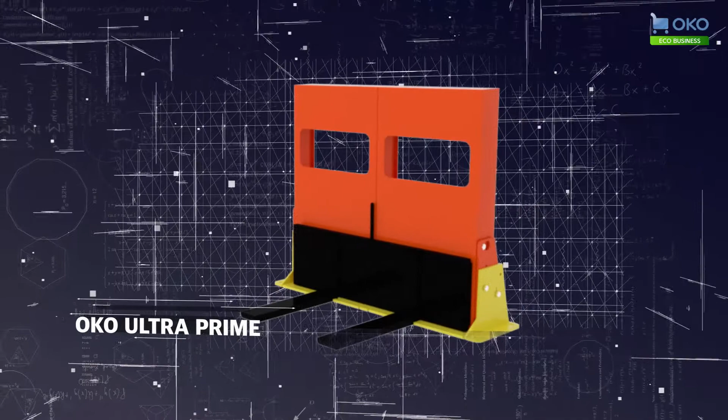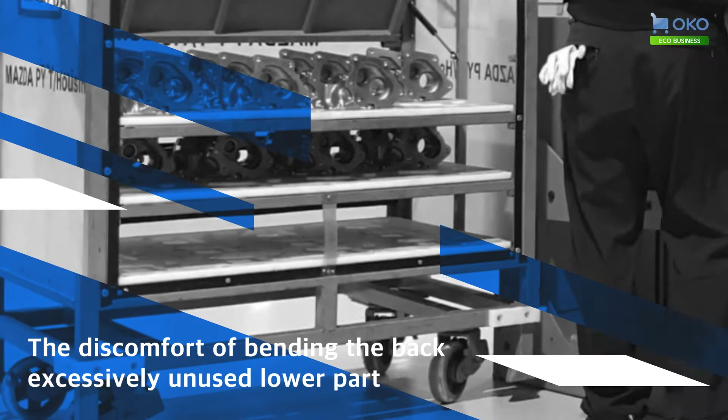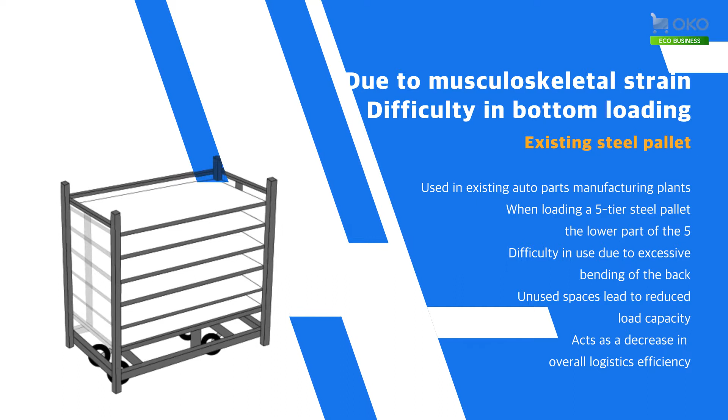In every process of logistics, OKO's Ultra Prime increases load capacity with decreased number of shipments, reduced carbon emissions, and costs. The 5-leveled steel pallet used in existing auto components manufacturing plants was not used for reasons of excessive waist bending when carrying from the 2 lower stages of the steel pallet. These unused levels resulted in reduction of load capacity, which caused the entire logistic process to lessen its efficiency.

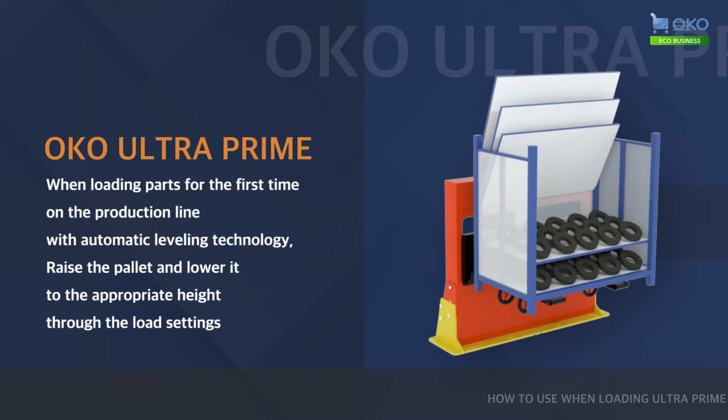OKO's Ultra Prime provides a highly efficient logistics system by focusing on these facts. Through automatic adjusting skill, when the production line loads components primarily, insert the steel pallet into the Ultra Prime fork to raise the height of the pallet, then adjust it by lowering it through load setting.

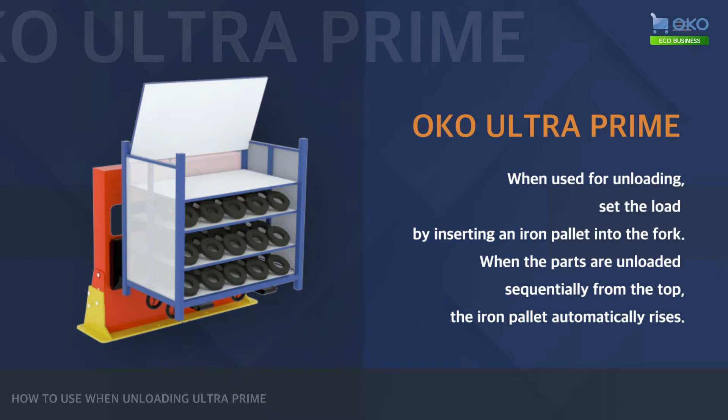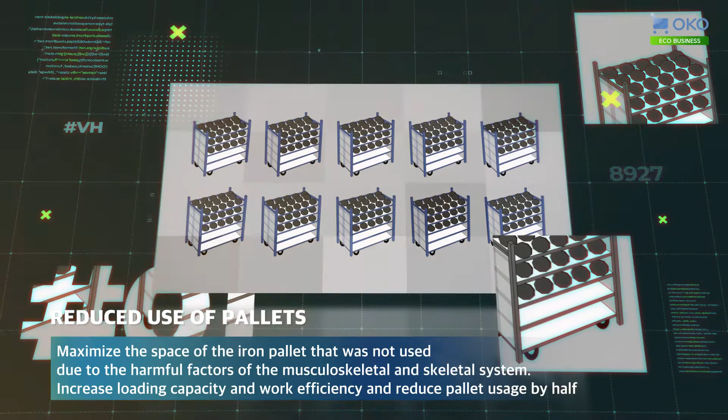Conversely, when used for unloading, the steel pallet will automatically be raised by inserting it into a fork for load setting, then unload the components from the top to the bottom. This increases load capacity, work efficiency, and reduces use of pallet to half of its usage, as it maximizes the space of steel pallet which had not been used as it caused damage to the musculoskeletal system.

In addition, wheels can be installed, and the use of OKO custom pallet with stationary storage attached will reduce the number of pallets by 1/3, and the number of shipments will be reduced by 1/10.

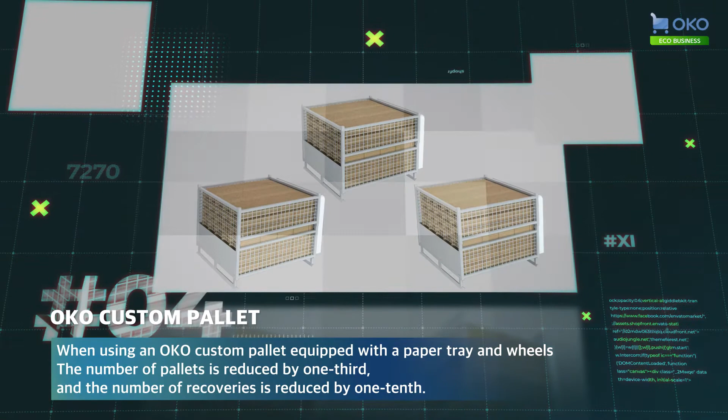In particular, the OKO custom pallet can be connected to a tractor to move large quantities of items in various ways. By using electric transport cars and tractors, the process of arranging parts can be easily incorporated into the assembly line, effortlessly transporting items and decreasing the number of shipments.

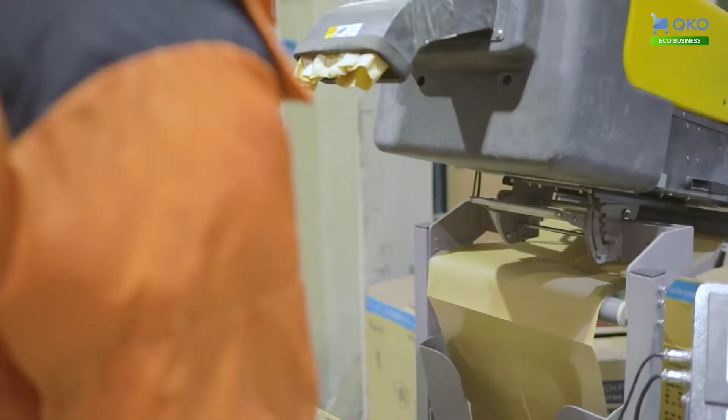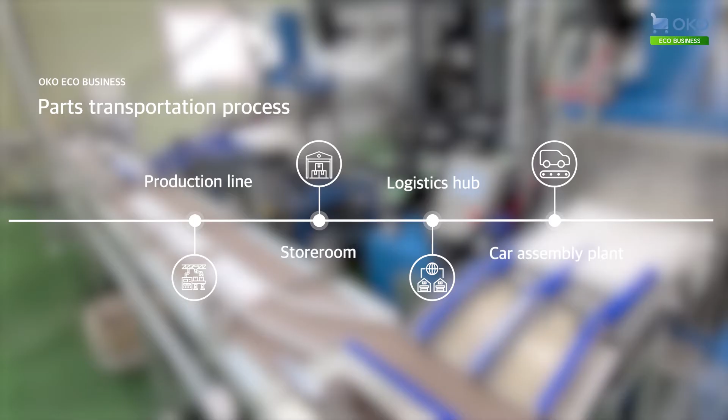OKO Eco Business's product is stackable up to a 3rd level, while the original steel pallet is stackable only to a 2nd level, throughout the component's transportation process from empty pallet storage, production lines, material storage, logistics hub, to vehicle assembly plant. It also reduces the number of products to be used, area for storage, and number of transportations by 1/3, making components stackable twice the original per product.

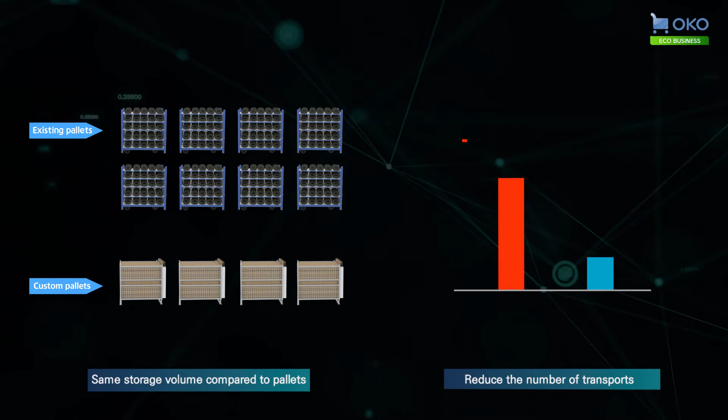This begins the revolution of the components factory and assembly factory. The significantly reduced number of shipments has a 67% reduction effect compared to existing carbon emissions through logistics, and also results in a 70% cost reduction due to optimization of storage space, working environment, and logistics.

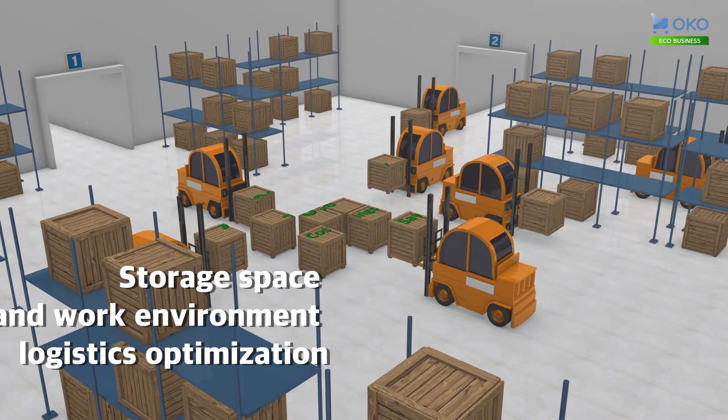It is the generation calling for a revolution.